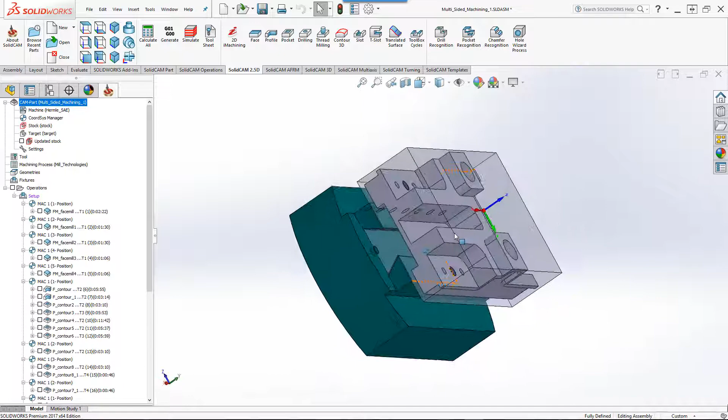In this recording, we'll demonstrate the use of SolidCAM's multi-sided machining on this machine fixture part. Note that this part has to be machined on multiple sides, whether it be the top, this side over here, or this side over here. All of these sides must be machined, and this must be done using SolidCAM's multi-axis Indexial machining. If we take a look at our coordinate system manager, you'll see that we've made different positions for different sides of the part that have to be machined.

In our first set of operations, I'd like to do a face mill operation on each one of these sides. Let's start with the very first operation, working in MAC 1 position 1. The boundary will be around the stock itself. The face mill I'll be using is a 100 millimeter diameter face mill. As far as the levels go, I just want to do this with one pass, not multi-step downs, so I'm leaving this at 0.

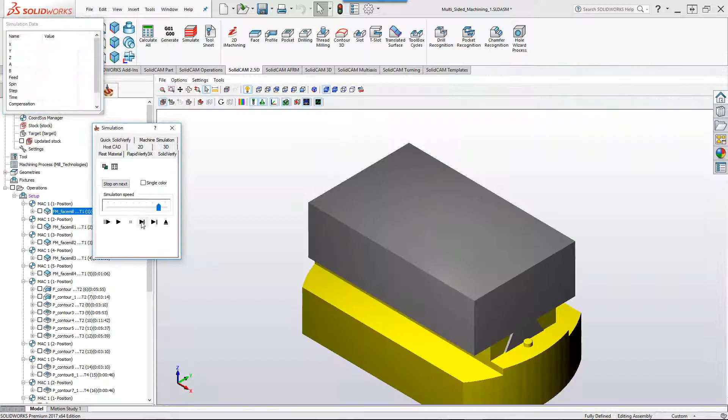If I go to technology, you'll note that I'll be working in the hatch technology. The reason for that is that my part is actually wider than the tool itself, so the tool cannot do this in one pass, and I'll be using the hatch technology. If we take a look at our simulation, you'll see that the tool will go down across the part in a hatch fashion, clearing all the material on top.

In our next operation, we'll be doing a face mill again, but this time on this side of the part. Going into the operation, you'll note that we'll be working on MAC 1 position 2, and the boundary this time will be around this part. The face mill we'll use is the exact same one from our last operation, and in our levels you'll note that we have 2 millimeters of material to remove.

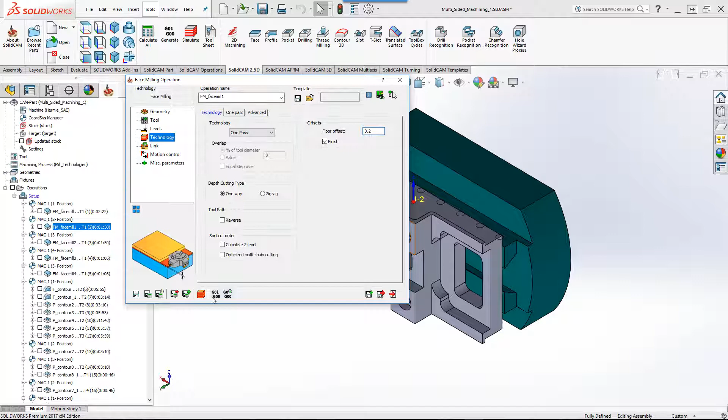In our technology, you'll note the following: we'll be doing this with one pass, since the tool is actually wider than the material that has to be taken off from the part in this particular case. We should also look at one more option, the floor offset — I'll be leaving 0.2 millimeters off the floor and then doing a finish cut on the part to get a smooth finish. If we take a look at the simulation, you'll see the tool go down and do that one pass over, and now it's going to go back and do one more pass for the finish cut.

The rest of the face mill operations you see here will be using the exact same technology we did in MAC 1 position 2, to clear off this side over here, the flip side, as well as this side over here and the bottom over here.

In our next operation, I'd like to do a profile operation to clear off this area over here. Going into the operation, you'll see we'll be working in MAC 1 position 1. The geometry in this particular case starts from this line over here all the way to the other side over there. The end mill we'll be using will be a 20 millimeter end mill. The levels will be going from our top position up until our profile depth over here.

Now let's go into our technology. You'll see that we'll be using a wall offset of 0.3 and a floor offset from the floor, and we'll be doing a step down of every 10 millimeters. Since this is a relatively wide area where the end mill cannot cover this entire floor with just one pass over, I'll use the option of clear offset so that we can step across the part to get to the actual wall, starting from a clear offset over here and then working its way up until it gets to the actual wall.

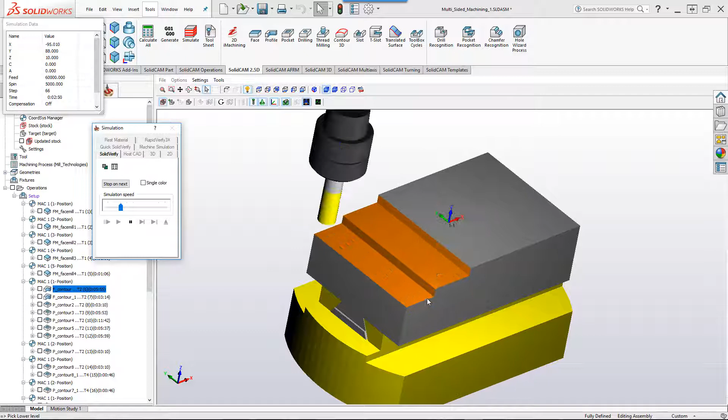I'm also using the option of complete Z level. What that does is first clear off the top in the first step, then go back and clear off the next step, up until it gets to the very bottom. If we take a look at our simulation, you'll see the end mill go down, do the clear offset, and then when it finishes that step, go to the next step, clearing it off, and then do the final step at the bottom until it gets to the actual wall itself.

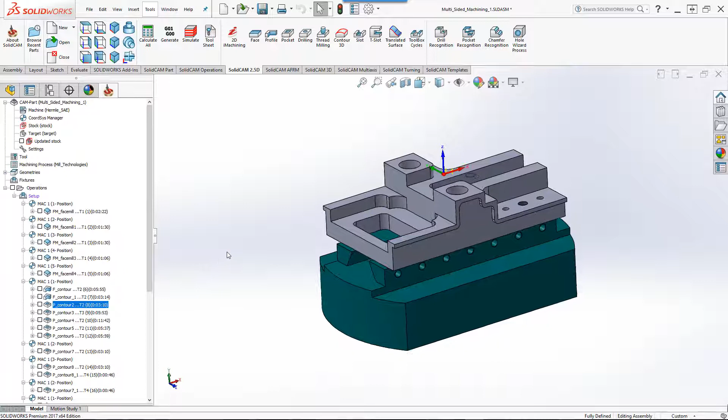In our next profile operation, we'll be doing exactly what we did in the previous operation. However, this will just be a finish cut for the floor and the wall. After that, we'll be doing a pocket operation. The area I'd like to work on now is this area over here.

If I go into the operation, we're still working in MAC 1 position 1, and my geometry in this case will be this area, shown as an open pocket. The end mill will be the exact same end mill used in the previous operation, and my levels have our upper level as shown over here, with our lower level at the very bottom of the pocket.

If we go into our technology and into the open pocket, you'll see we have the strategy of use profile strategy. So even though this is a pocket operation, since it's open, it can also do a profile strategy just as if it was doing a clear offset, and we've also marked it as approach from the outside.

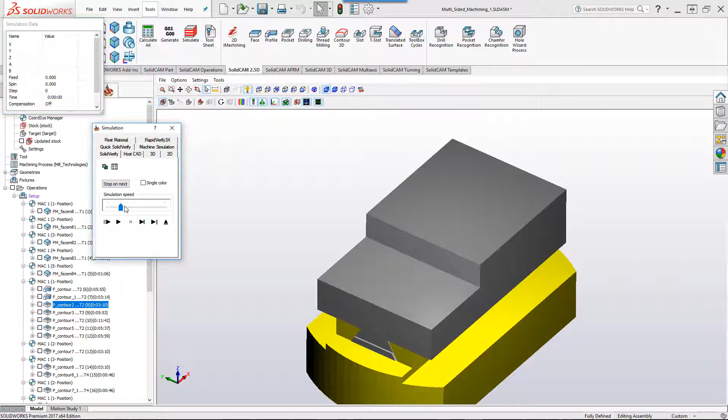If we take a look at our simulation, you'll see the end mill go down and work on that pocketed area just like a clear offset, and now it's also doing the finish cut on that floor and wall. In our next operation, we'll be doing a pocket operation, this time on this through pocket over here.

If I go into the operation, again we'll be working with MAC 1 position 1, and the geometry is this closed pocket over here. The end mill in this case will be a 12 millimeter end mill.

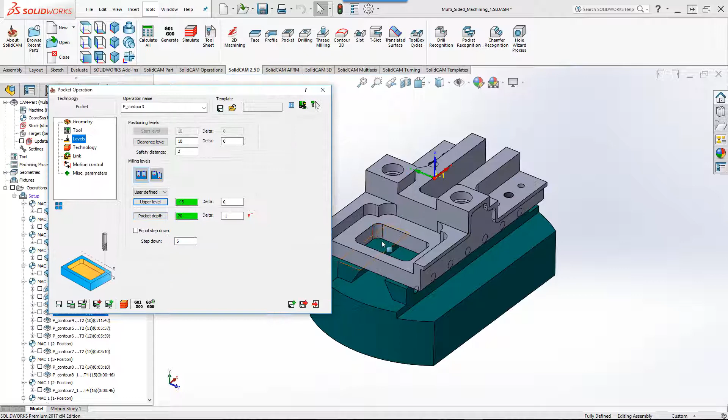My levels, as you can see, have my upper level at minus 45, this level over here, and the pocket depth will actually be through the part at the bottom. We've also added a delta of minus 1 millimeters so it goes past that edge, and we'll be using a step down of every 6 millimeters.

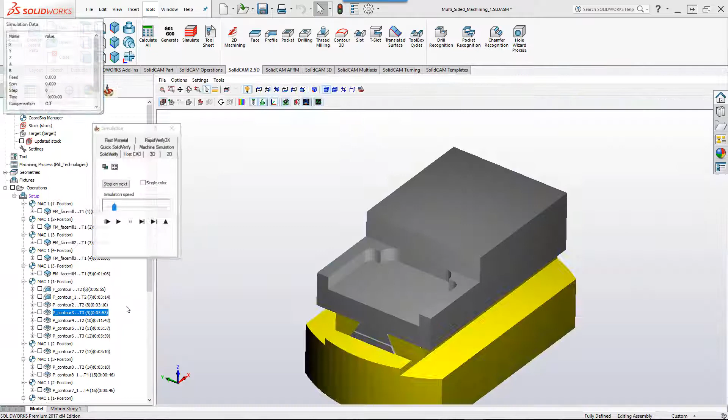You'll note in our technology that since this is not an open pocket, the open pocket option is not available. If we take a look at the simulation, you'll see the tool helical its way through into the part and then finish off the pocket all the way to the very bottom.

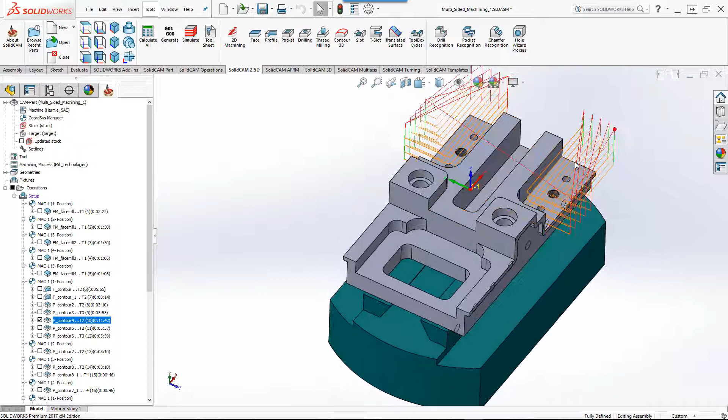Next, we've done 3 more pocket operations. The first one is for these 2 areas over here, where we have these edges marked as open edges, so we're able to use an open pocket strategy for this. We've also done this area over here as an open pocket area, where all these edges are marked as open, as well as this one, so we'll also do this using that open pocket strategy.

And the last operation for the pocket over here is this area, again with this edge marked as an open pocket.

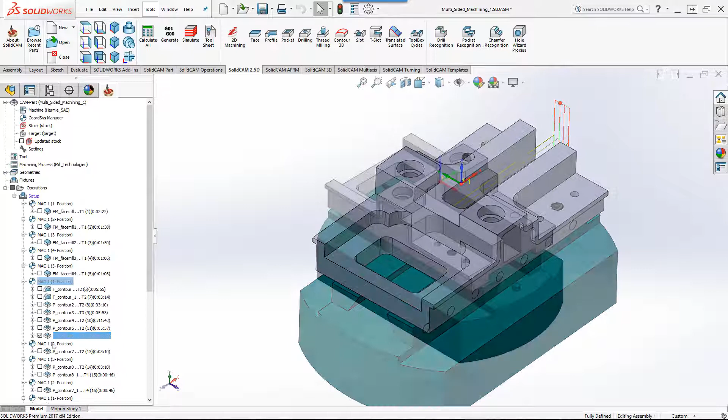In our next operation, we'll be working on the pocket that's on this side, and we'll also do an operation on the flip side, both done using the pocket operation. If I go into the first one over here, the geometry is on MAC 1 position 2, shown over here, with these edges marked as open edges.

The end mill we'll be using will be a 20 millimeter end mill, and we can see our levels going down 5 millimeters. If we take a quick look at our simulation, you'll see we'll be working on that area, and since this is an open pocket, we'll be using the open pocket strategy to clear off that material.

Now the same was done in our next operation on the flip side, again doing the exact same thing as we can see over here in our toolpath.

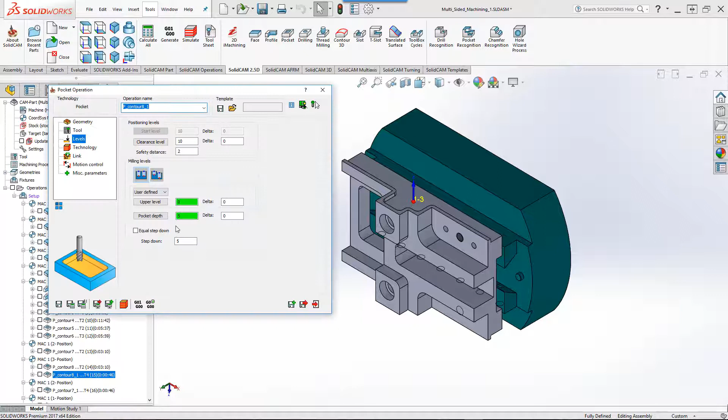In our next operation, we'll be working on the same geometry as before, but doing what we call rest machining. Since our previous end mill was too large to go into these corners, we've used a smaller end mill to clear out only those corners, and as you can see, we're using the 10 millimeter end mill.

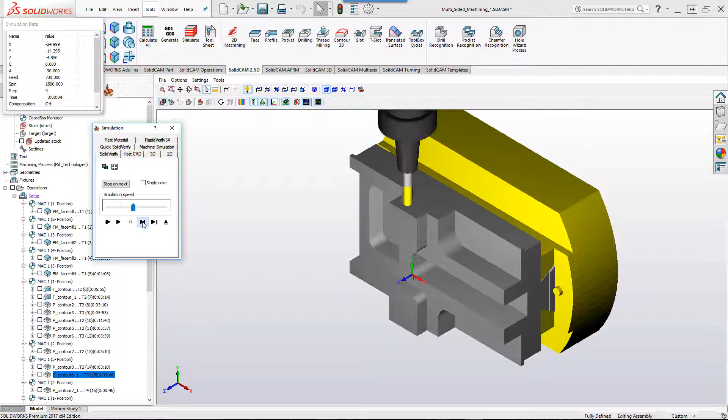If we go into our technology, you can see we've used the option of rest. If I go into my rest option, we've also noted that my previous tool diameter was a 20 millimeter end mill. If we take a look at the simulation, you'll see the end mill will only work in those corners, clearing off only the areas that were not machined before.

Now, the same was done in our next operation on the flip side, clearing only the material that was on this side over here. If you take a look at the toolpath, you can see it's only working on those areas. Now, let's start with our drilling operations.

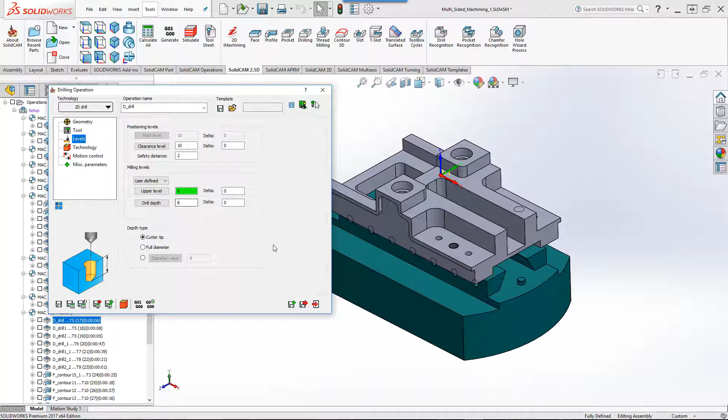We need to drill out on this side all of these holes that we see over here. So first, we'll start with our spot drill. If I were to go into the first operation, you'll see that we'll be back at MAC 1, position 1, and the geometry in this particular case will start off with these two large holes on top. This spot drill will be a 16 millimeter spot drill, and the levels in this particular case, I'll just be going down a total of 8 millimeters into that hole. If I were to look at the simulation, you'll see that the drill is actually going into those areas using the pecking option for drilling and going down to the defined depth that I gave it.

We've also done the same for the next operations, being these holes over here as well as these holes over here. Now, in our next operations, we'll be just doing a regular drilling operation to drill out the holes as shown over here. Taking a look at this particular operation, you'll see that we'll be using a drill of 17.5 millimeters, and the levels will go all the way down to the bottom using the full diameter of the tool to get to the bottom, plus we've added another 3 millimeters to go past that area. Taking a quick look at the simulation, you'll see that the tool will go into those areas, drilling all the way to the bottom of those holes.

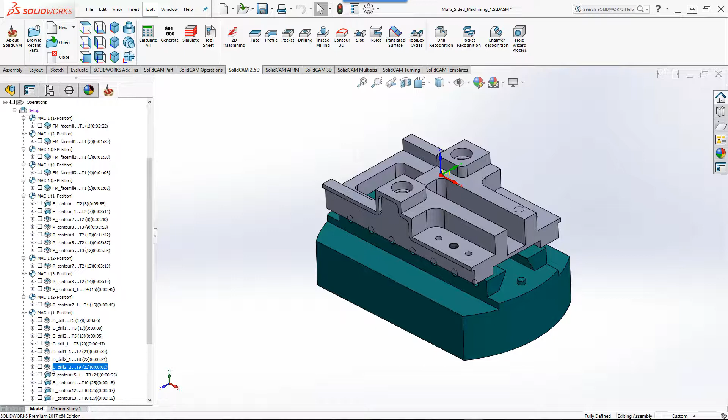Now, the same was done for all of these operations over here, for those holes, and for those holes as well. Now, if we take a look at our last drilling operation, this will actually be the tap for these holes over here. Taking a quick look at the operation, you can see that my geometry are those holes over there, and the tool I'll be using in this particular case will be my M12 tap for those holes. If we go into our technology, you'll note that it's automatically put at the tap cycle.

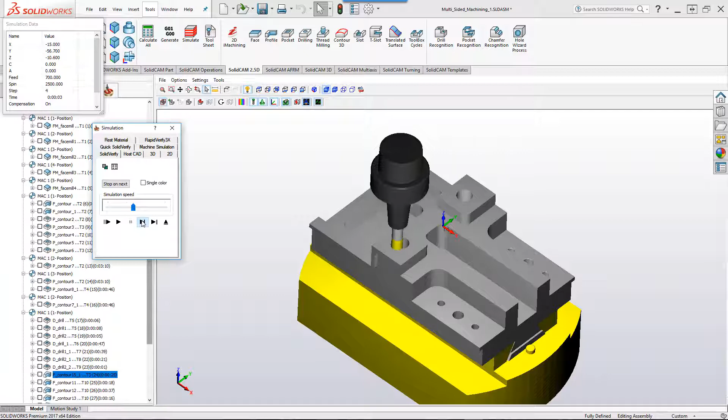In our next operation, we're just going to do a simple profile operation to mill out this counter bore hole. Taking a quick look at the operation itself, you'll see that the geometry are these circles over here, and the tool that we'll be using will be a 12 millimeter end mill. And if we take a quick look at the simulation, you'll see that the tool will just go directly into that hole and machine out those counter bore holes.

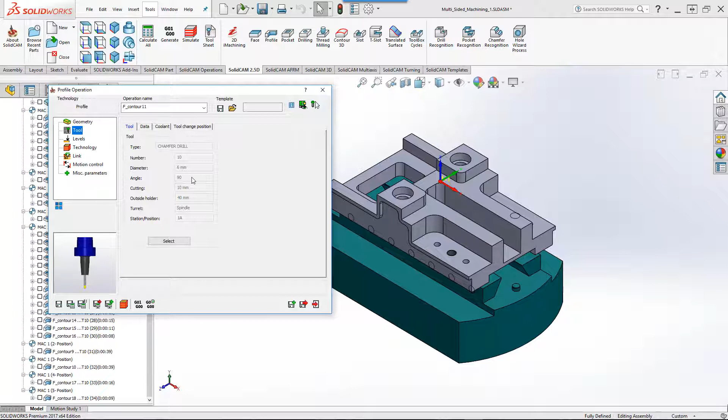Now, to finish off this part, we need to put chamfers on these edges over here to break the sharp edges. So for that, we've done all of these operations for all the different sides. If we were to go into our first operation, you'll see that my geometry in this particular case are these edges over here, and the end mill that we'll be using will be a 6 millimeter chamfer drill. The levels in this particular case is marked at 0.2 millimeters, as this is the size of the chamfer I'd like to put on those edges.

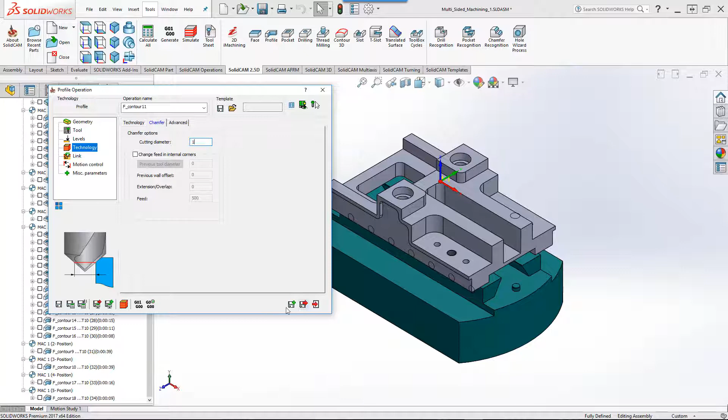If I were to go into my technology, you'll see we've used the option of chamfer, and in chamfer, we've told it that we're using the cutting diameter of 1 millimeter to work on those edges. Taking a look at the simulation, you'll see that the tool will work exactly on those edges.

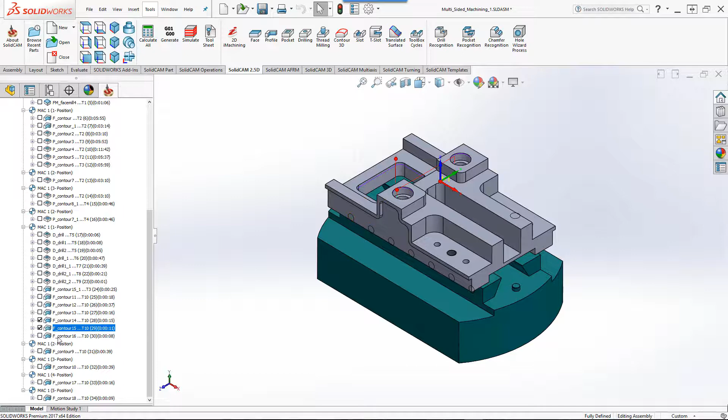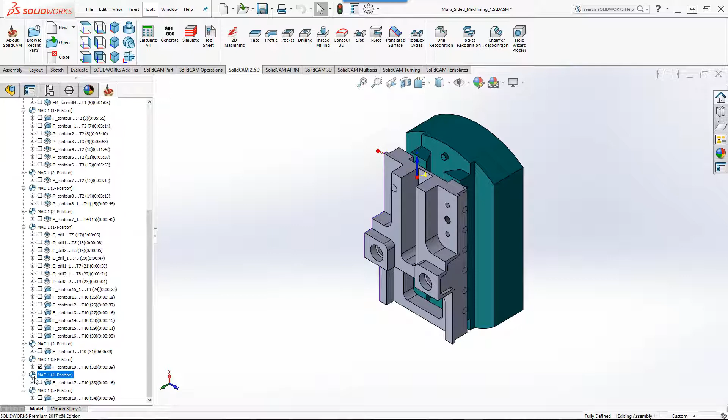Now, the same was done for the following edges. This one over here, working on those edges over there, and we've also had it done for these areas as well. The same thing was done for this area, the holes itself, and this area around over here. Now, if we were to go down to this side over here, you'll see that we've also done it for this edge over here, and on the flip side for this edge over here. Going further down, you can see that we flipped it over and done chamfers on these edges, as well as chamfers on the flip side over here on these edges.

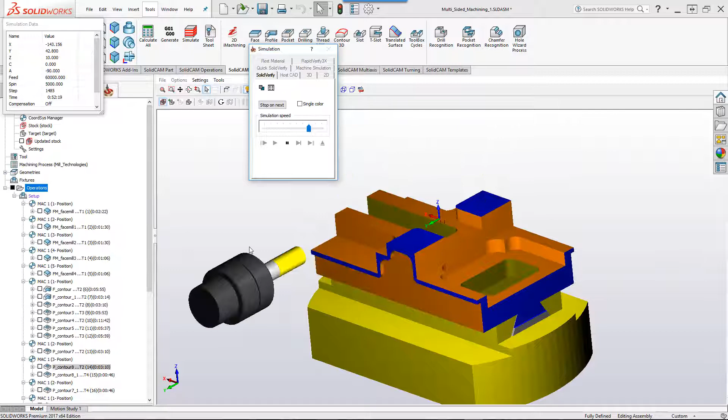This actually completed this entire part. If we take a look at the actual simulation on the entire part, you'll see that we've done all of the things on the Indexial machining it in one setup from all sides, including the chamfers at the end, completing this part.